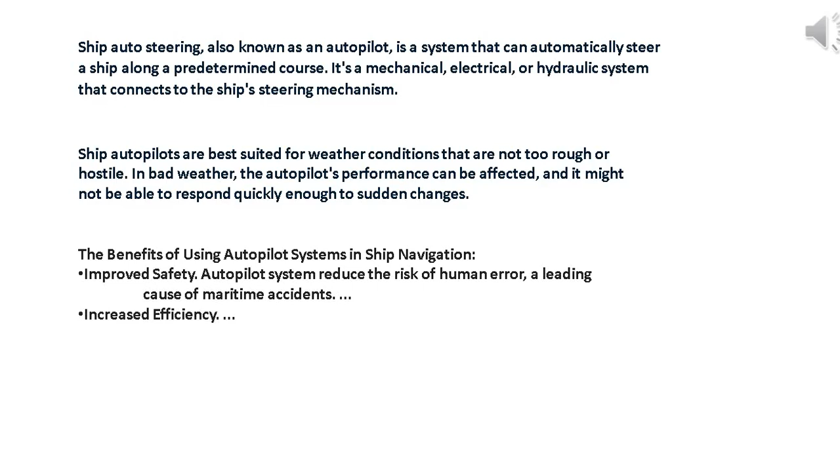The benefits of using autopilot systems in ship navigation: improved safety, as autopilot systems reduce the risk of human error, a leading cause of maritime accidents; increased efficiency; reduced crew fatigue; precise navigation; remote operation; advanced sensors; artificial intelligence; and predictive analytics.

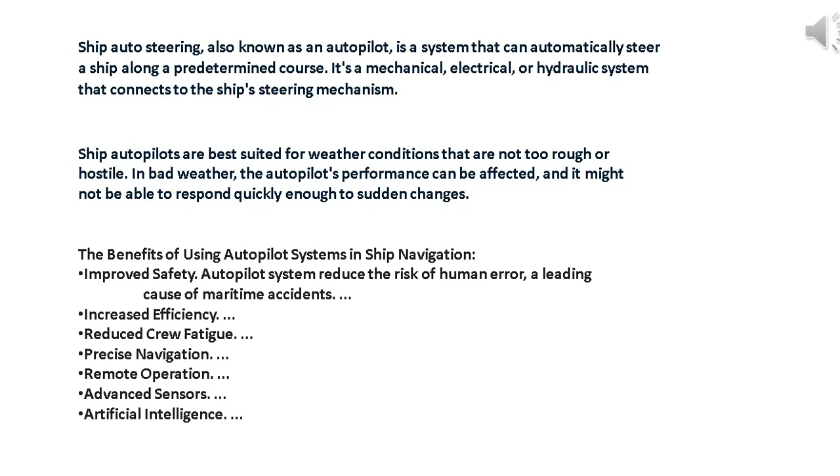In manual mode, the vessel can be hand-steered using the follow-up helm or a non-follow-up emergency tiller. Hand steering is used when the ship is maneuvering and navigating in restricted waters, channels, and areas with traffic density.

Ship hand steering is the process of manually steering a ship using a wheel or tiller. It's used when the ship is navigating in restricted waters or areas with heavy traffic.

Follow-up (FU) steering is a method of controlling a ship's rudder using a lever or handwheel. The rudder follows the position of the lever, moving to the desired angle and holding it there. FU steering is often used for routine operations and maintaining a steady course.

Non-follow-up (NFU) steering is a backup method for steering a ship that's used when the follow-up (FU) mode fails. NFU steering is direct and responsive.

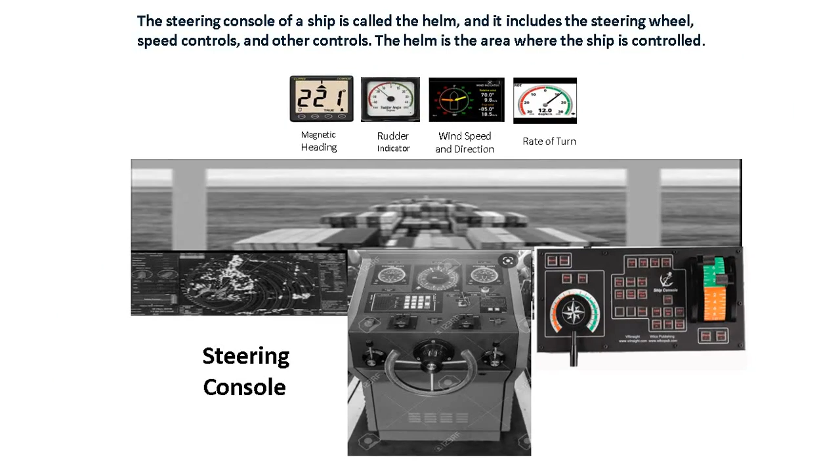Let us understand the difference between follow-up and non-follow-up steering.

Follow-up is the principal mode of steering. As the name suggests, in this mode the rudder follows the movement of the steering helm. Wherever the helm goes, the rudder follows it. For example, if the helm is put to 10 degrees to starboard, the rudder will follow to 10 degrees starboard and remain there as long as the wheel is kept at 10 degrees starboard. To bring the rudder back to midships, you will have to bring the wheel back to midships. Follow-up steering is basically followed during hand steering and is also used in the autopilot mode.

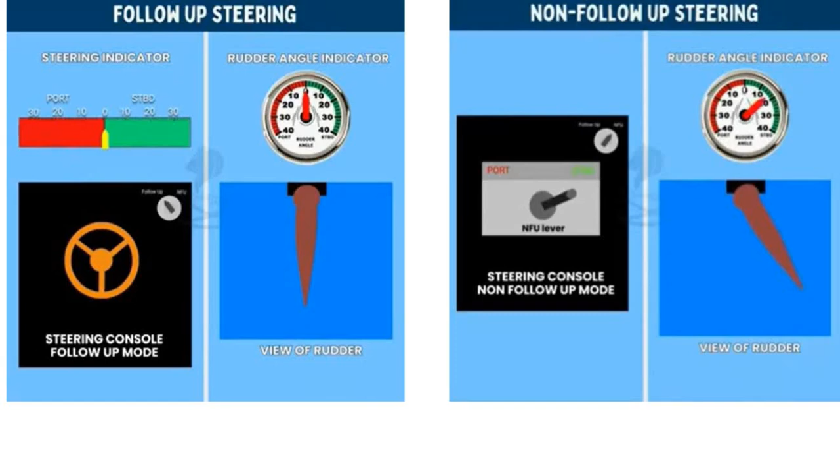Non-follow-up steering is not done with the steering wheel but with an NFU lever or joystick. The NFU lever does not have any markings. As long as this lever is kept pressed, the rudder will continue to turn. Once the lever is released, the rudder will stop turning.

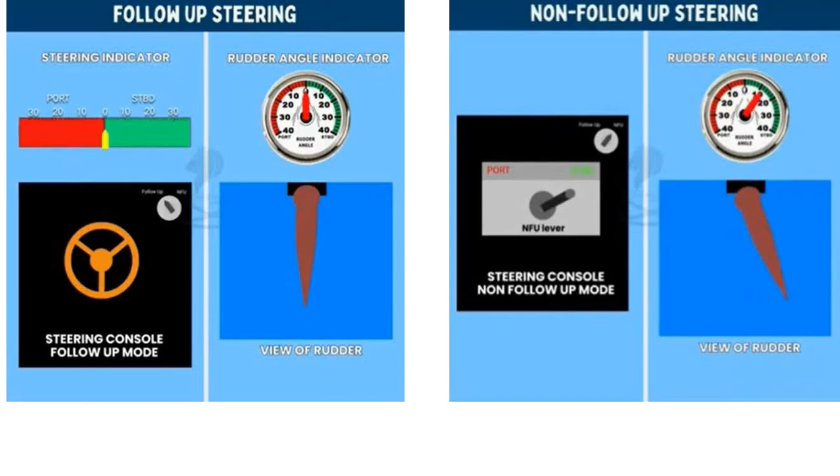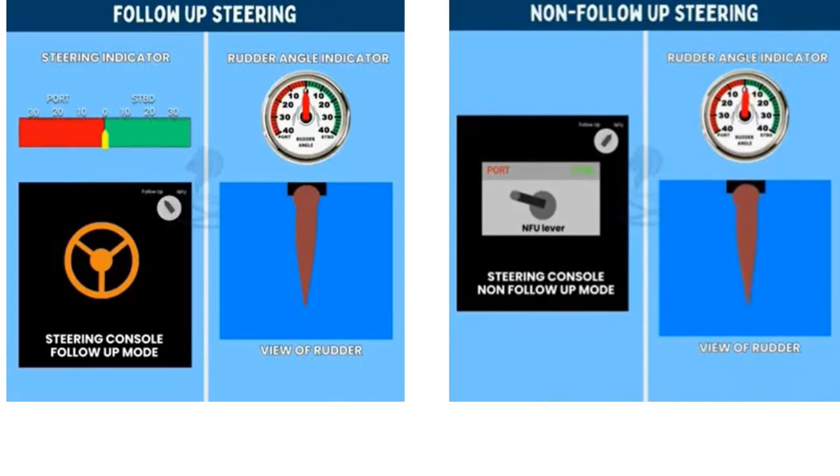For example, if the lever is pressed to starboard until the rudder turns to 10 degrees, when the lever is released it springs back to its original position, but the rudder will continue to remain at 10 degrees starboard. To bring the rudder back to midships, the lever will have to be pressed to the opposite side, that is port side, until the rudder comes back to midship. NFU mode is used when the steering telemotor system fails, as NFU sends rudder setting directly to the control unit.

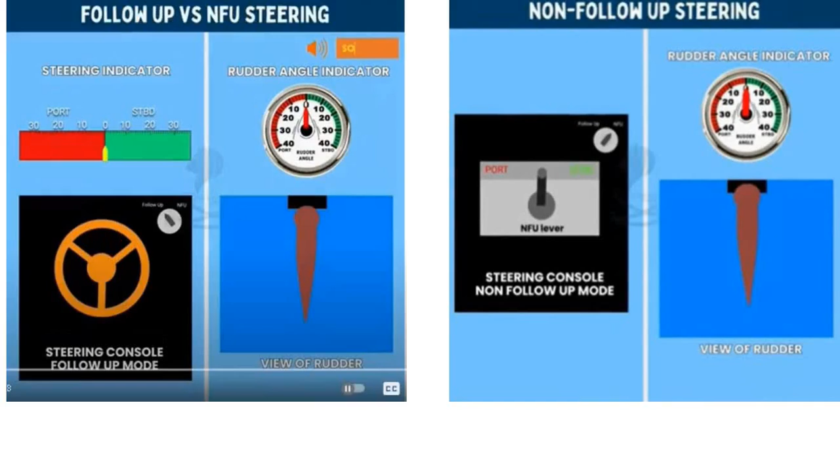Let us understand the difference.

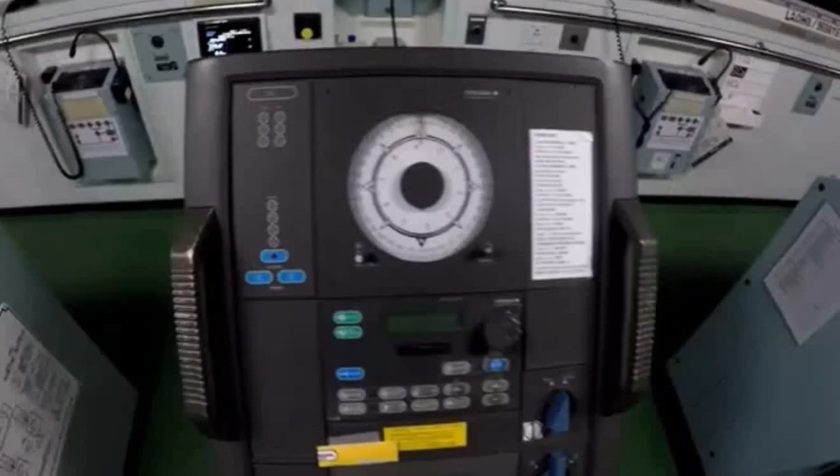To start the system, first of all we need to start the steering gear, steering pump. This is the steering gear alarm panel, and the switch is here. To start, there are 2 steering pumps, so now we shall run steering pump number 1.

Okay, I just switched it on. Wait for a few moments. Okay, so you can see it's in the start. It's running, okay, it's running.

We can operate the system. So how do we do that? First of all, we look at this. Right now it is in the off position. This toggle is in the off position. Let's switch it to follow up 1 or 2.

Okay, stop the alarm. Alright, so now we can use the hand steering. As you can see, it's set to hand. We are ready to use the hand steering. Let's test it out.

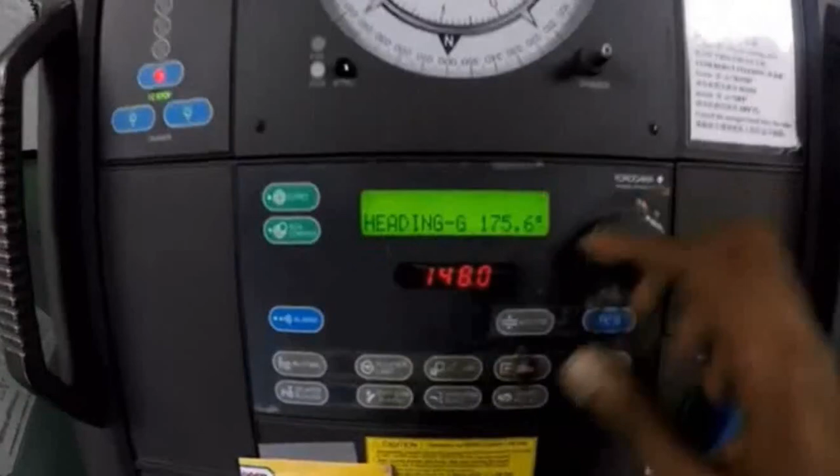First of all, we make sure this autopilot heading is the same as our heading right now, because sometimes the autopilot heading will be set to very far from our present heading, so we need to make sure it's the same. We press this button, HS. Press this button. So as you can see, it is now the same heading as our ship head.

Alright, so we can switch it to autopilot and just press enter, and we are good to go. Autopilot is ready for use.

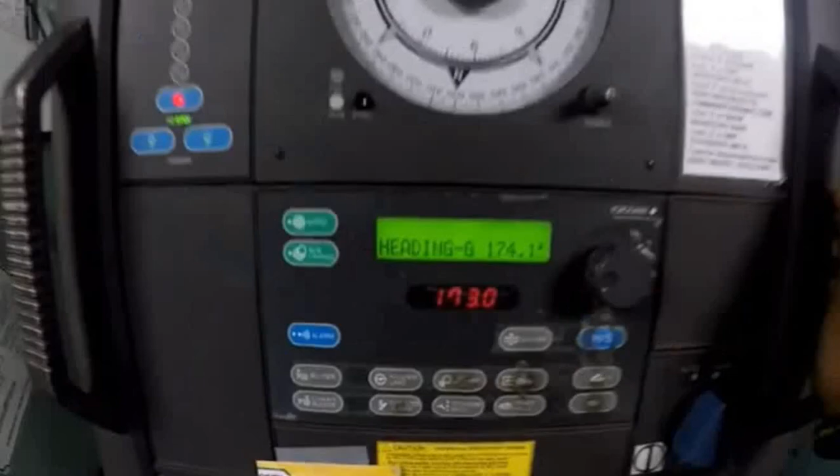So to alter course, we just use this toggle, push and turn. Push and turn, push and turn. 2 degrees port side, 2 degree port side. Okay, so what are the other buttons do?

Here we have a rudder limit. You can set the rudder limit from 1 to 35. This is off course alarm. You can set the limit angle. This button is to adjust the dimmer contrast.

Okay, you can see this button, operation mode. We have precision and economy. So right now we are set to precision mode. Okay, draft mode.

Draft mode: middle, ballast, full. Right now we are partially loaded, so we are set to middle. Enter. Always remember to change it to ballast or full after your operation.

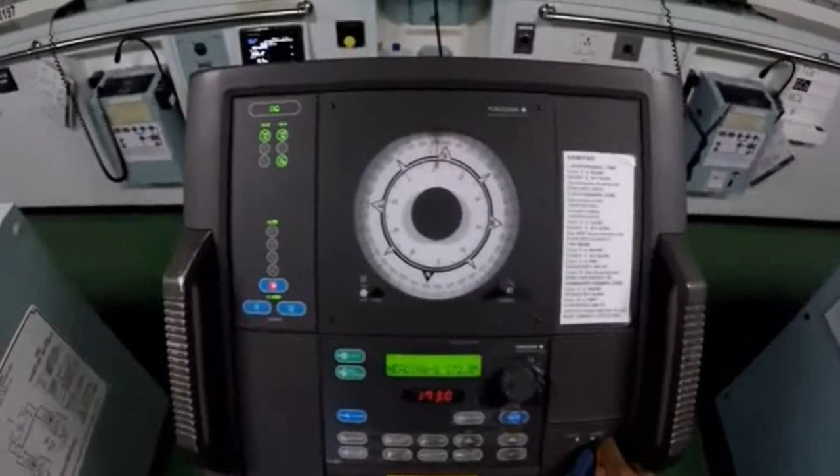Okay, so that is about it for the autopilot. Just in case, all of a sudden when you are navigating and then your autopilot suddenly fails, what to do? Immediately switch it to hand steering first of all.

Make sure the steering pump is running, hand steering, follow up 1, and then try to steer using follow up 1. If follow up 1 does not work, switch it to follow up 2. And if follow up 2 also doesn't work, we can try non-follow up. Let's try non-follow up. Switch it to non-follow up now.

Non-follow up, we are not able to use this helm. As you can see, the helm is not responding. The rudder is not responding to the helm order. You see, port 20, it's not responding. It will respond to this toggle instead. As you can see, port starboard, like this.

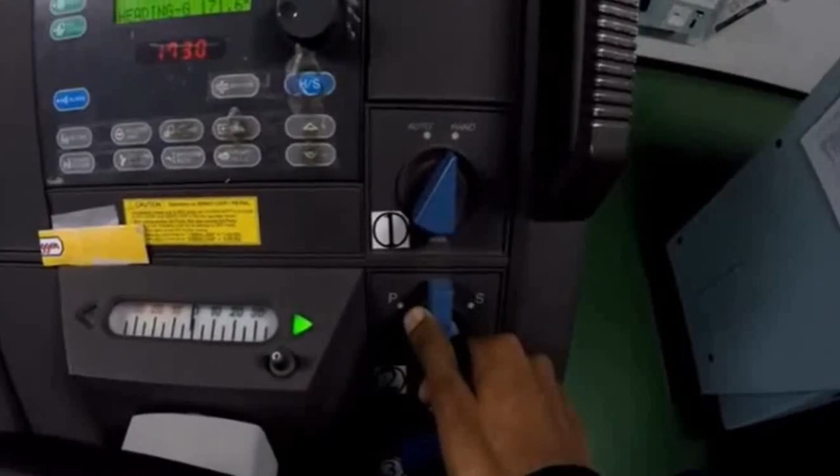This is how you operate it. And then you can see the rudder angle is changing. Starboard 10 now. Okay, hold it until you reach the desired angle

and then release. For example, if told port 10, hold it at port side, hold it until the rudder reaches port 10 and release. Again back to midship, starboard. Once the rudder is almost 0, release. And it's back on midship.

So this is basically how the basic operation of the steering system works. As a recap, make sure the steering pump is on, switch it to follow up, and we can use the hand steering. To change to autopilot, press this button, HS, automatic, and press enter.

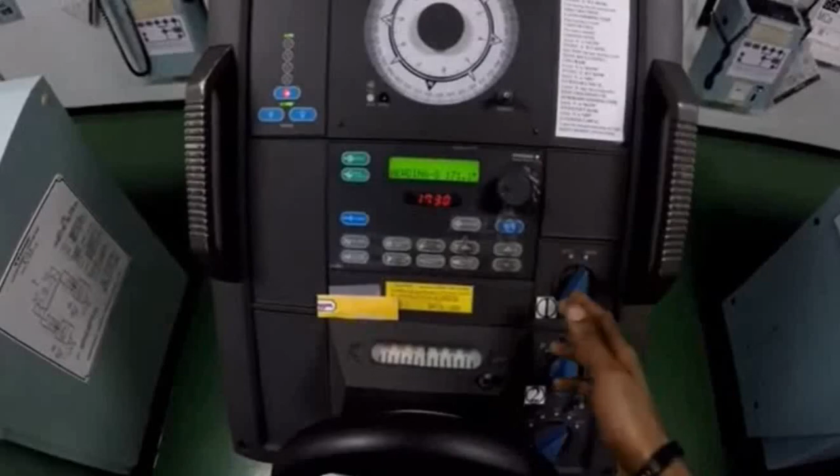Okay, this is for this system. For some other ships, you might not have to press any button. Just switch it to auto and you're good to go, you can sail. But for this system, you have to switch it to auto, press this button, then press this button, and it will steer the desired course.

In case there's a gyro failure, the helmsman standing here will have to steer visually using the magnetic compass. Can't see it on the camera, but you can see it through visual. The heading is showing there.

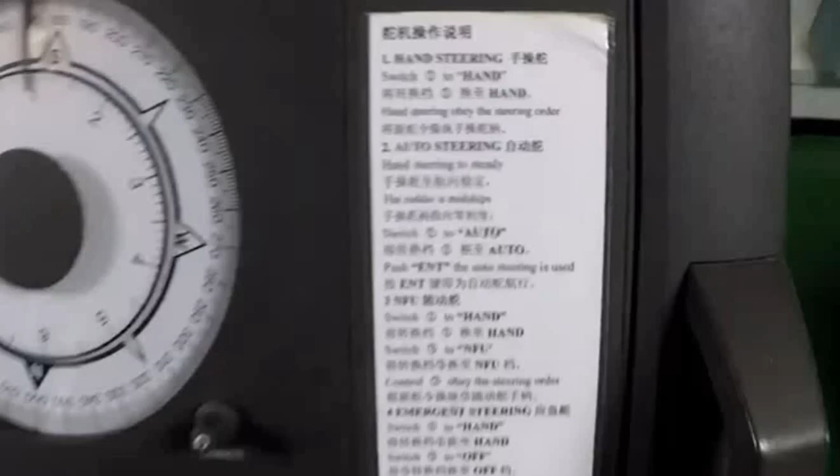Let's try to zoom. One thing I must add: if follow up doesn't work, non-follow up doesn't work, autopilot doesn't work, we have to steer using local control, which is in the steering gear room, which I will show next time. If you like, you can pause and read this.

Understanding steering gear in ships. We are all familiar with the use of a rudder, which helps in turning a ship as and when required. Rudders are the principal system for the entire motion and control of the ship. But we mustn't forget that the entire rudder action is dependent on another pivotal system called the steering gear. Steering gear integrated with the rudder system defines the complete turning mechanism mandatory for each and every ship, irrespective of size, type, and operation. The steering gear system has been an indispensable part of the ship's machinery since the advent of the very early ships, which were operated by hand.

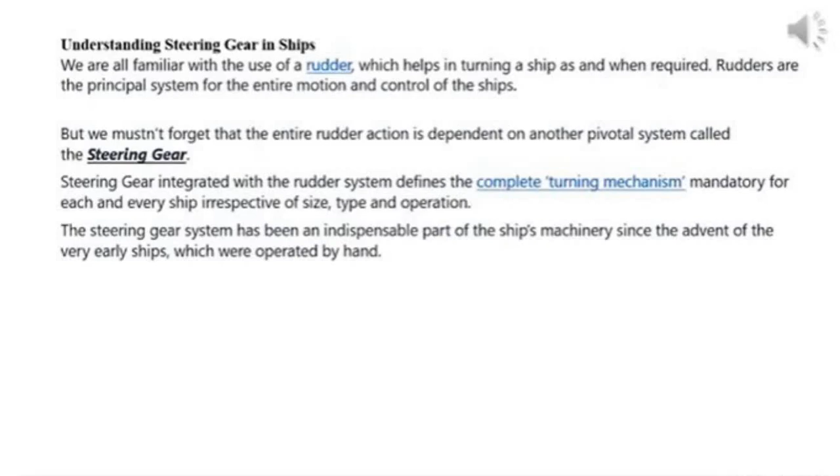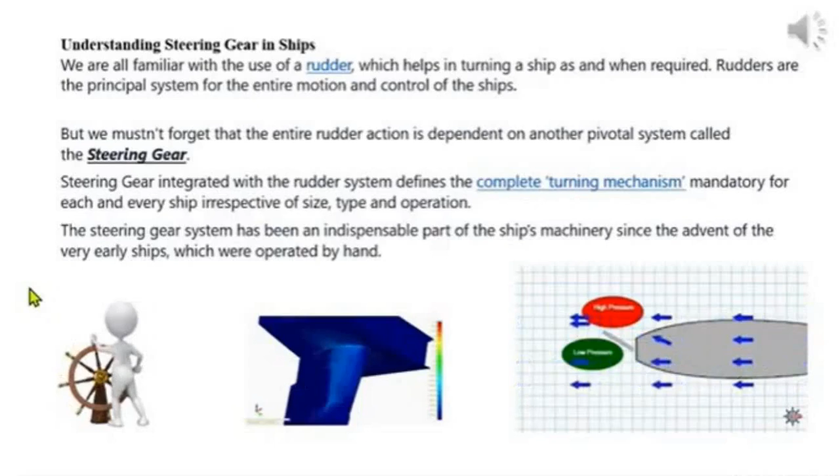If we now turn the rudder to port, we can see the effect it has on the flow of water. This port-type rudder has directed the water in a different direction, at an angle away from the boat. The extra water increases the pressure exerted on this side and decreases the pressure on this side. This pressure difference pushes the stern in this direction, inducing the desired turn to port.

Ship steering systems are crucial for the control and navigation of a vessel. They ensure that the ship can be maneuvered safely and effectively. Below are the main parts and functions of a ship steering system.

1. Rudder: a flat piece of metal or other material located at the stern of the ship. When turned, it directs water away from the stern, causing the ship to turn in the desired direction. 2. Rudder stock: a vertical shaft that connects the rudder to the steering gear, allowing the rudder to pivot.

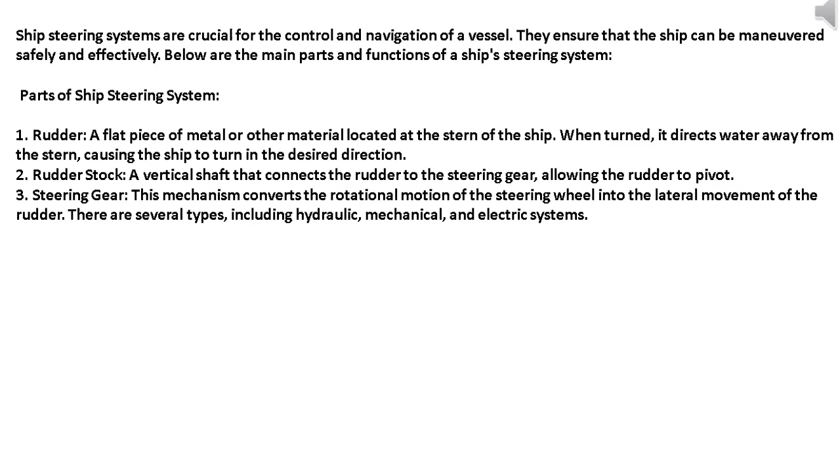3. Steering gear: this mechanism converts the rotational motion of the steering wheel into the lateral movement of the rudder. There are several types, including hydraulic, mechanical, and electric systems. 4. Steering wheel, or helm: the device used by the navigator to control the direction of the ship. Turning the wheel moves the rudder left or right.

5. Hydraulic system: in hydraulic steering systems, fluid pressure is used to move the rudder. This system typically includes hydraulic pumps, cylinders, and hoses. 6. Electronic control system: used in modern ships for automated and precise control of the steering gear. This may include joystick controls and monitoring systems.

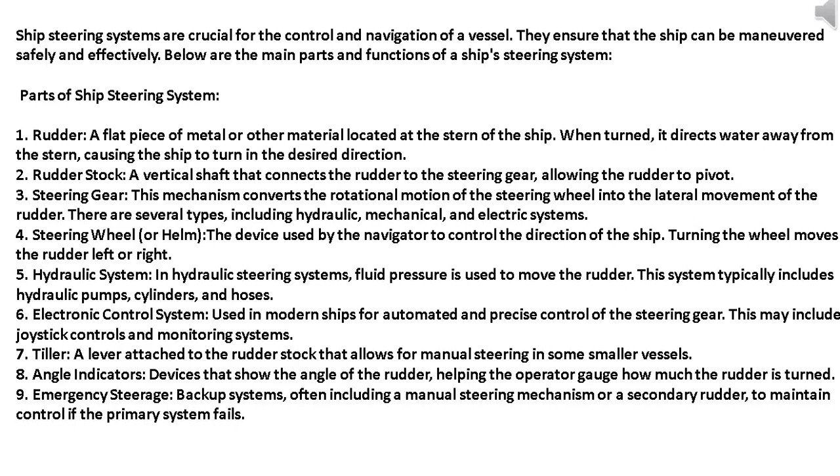7. Tiller: a lever attached to the rudder stock that allows for manual steering in some smaller vessels. 8. Angle indicators: devices that show the angle of the rudder, helping the operator gauge how much the rudder is turned.

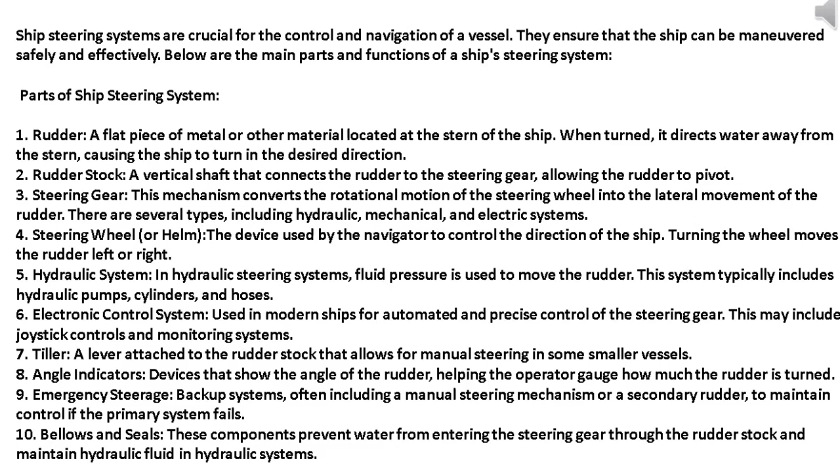9. Emergency steerage: backup systems, often including a manual steering mechanism or a secondary rudder, to maintain control if the primary system fails. 10. Bellows and seals: these components prevent water from entering the steering gear through the rudder stock and maintain hydraulic fluid in hydraulic systems.